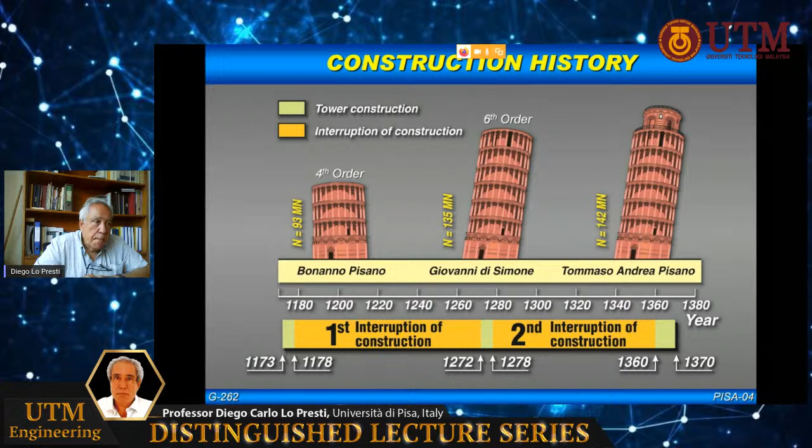The instrumental monitoring of the tower rotation started only in 1911. So before that date, the history of tower rotation has been reconstructed by looking at its banana shape, the shape of the tower axis, which testifies the attempts of masons to correct the progressive rotation of the tower. The last detail testifying this rotation is the number of steps to reach the bell chamber, 6 on the south side and only 4 on the north side.

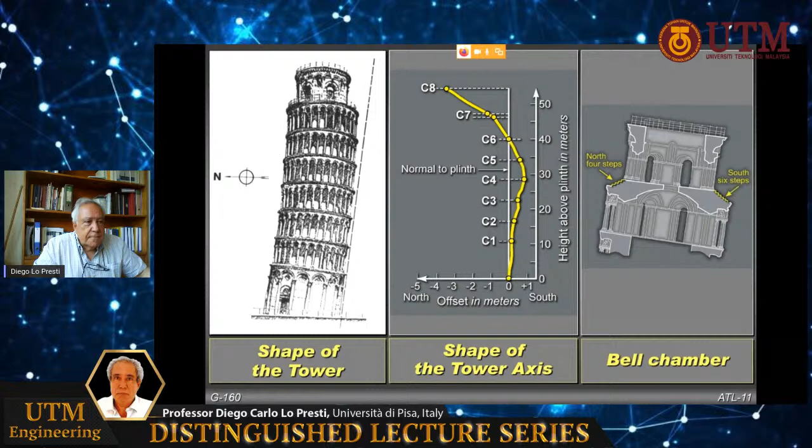Another two essential aspects, important negative aspects concerning the history of the tower, is the walkway excavation done by the architect della Gherardesca in 1838. This walkway is called the Catino, and the good intention was to show the tower in its original shape. Indeed, the tower sank into the soil because of the settlement.

But unfortunately, as the water table is just 1 meter below the ground level, after excavating there was a water inflow, and it was necessary to realize waterproofing work. All this activity, as we can see later, caused a very dangerous tower movement.

As for the structural aspect, the critical point is here, at the level of the first cornice. Indeed, there is a staircase constructed inside the annulus from the base up to the 6th cornice. And the presence of this staircase reduces the cross section at this level.

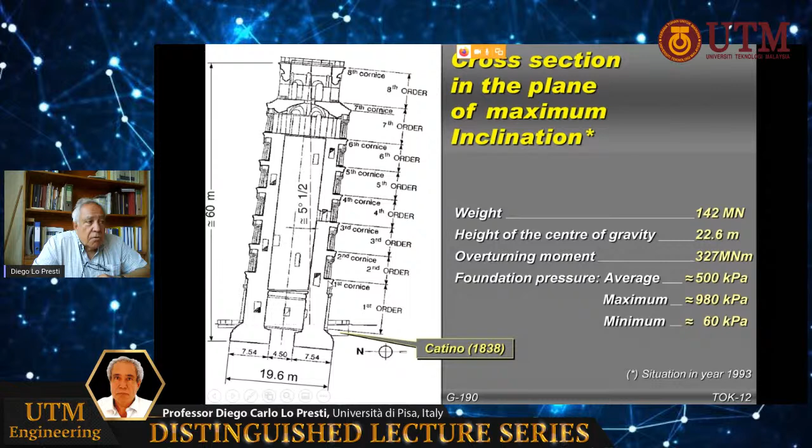You have here an idea of the infill and the facing, but especially of the stress distribution around this opening. And you can see the very high values that have been measured by flat jack in the external and internal facing, which are 10 times the stress in the infill. This is because of the presence of this staircase.

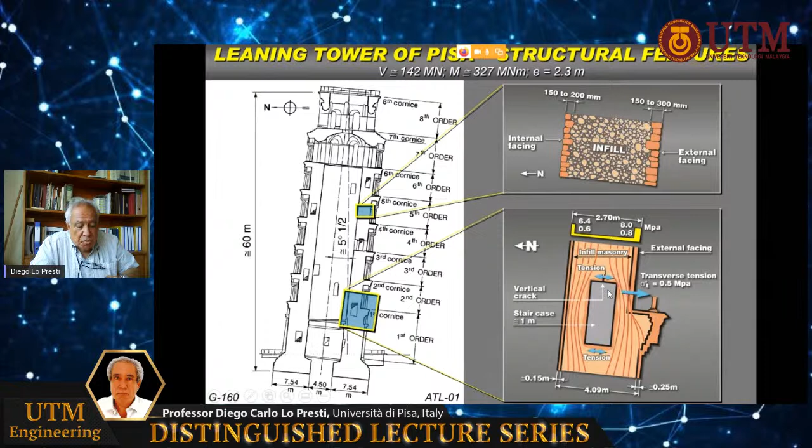So the committee considered the possible risk of a terrible collapse because of this problem. And as a countermeasure, 3 steel cables were put at that level for pre-stressing the structure.

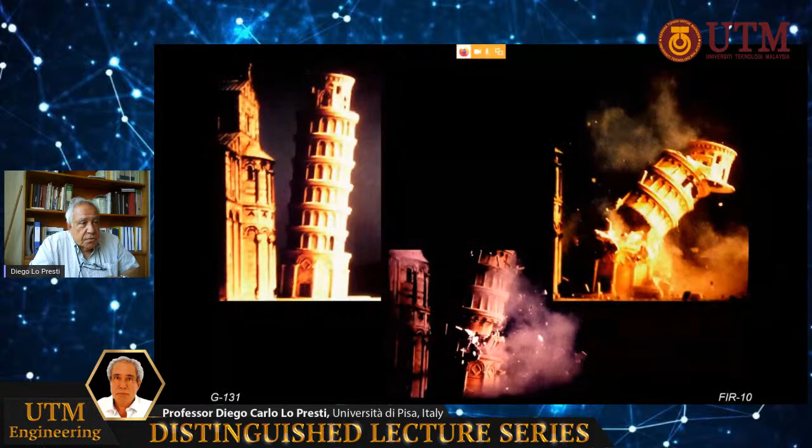As I told you, the movements of the tower have been reconstructed thanks to the shape of the tower axis. Here, the bell chamber was completed. And you can see that initially the tower was leaning towards north by 0.2 degrees. Then we have other documents, frescoes and written documents, that give us information about the evolution of the rotation.

The first measurement by plumb line was done by Cresy and Taylor in 1817. And after the excavation of the walkway around the tower, about 40 years later, another measurement with the same methodology was done by Rohault de Fleury. And this difference is about half a degree because of the negative effect of this excavation. Then instrumental monitoring started, and at this point in 1993, the rotation was about 5.5 degrees.

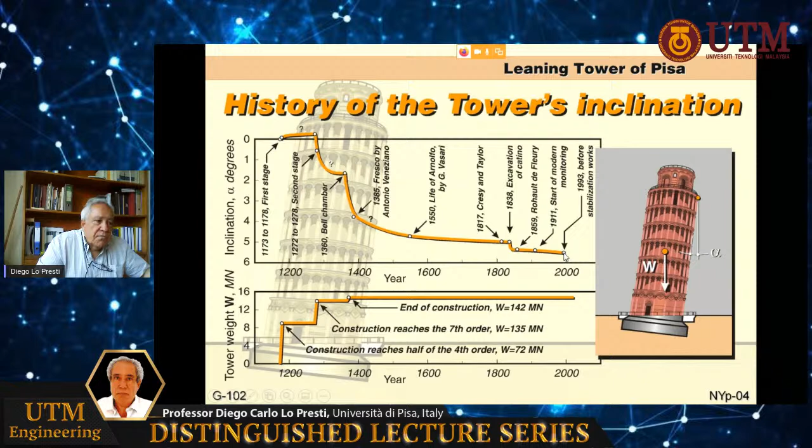So the main problem, apart from the structural problem we have already seen, was the increase of the rate of tilting and the high magnitude of the tilting. This is essentially a problem of soil-structure interaction because the structure is very slender and very heavy, and it is seated on a very compressible ground.

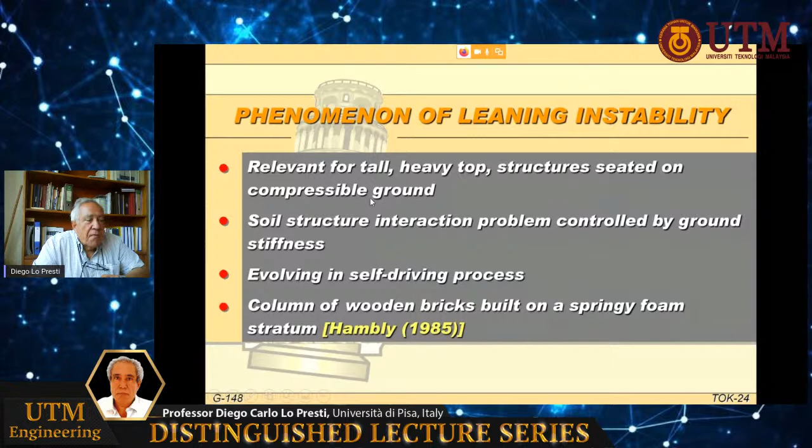The simplest model for this structure is given by an inverted pendulum with the mass concentrated at the top and the reaction spring at the base. We can model the spring as a foundation of a given diameter resting on an elastic half space with given characteristics of Young's modulus and Poisson's ratio. Rotation and settlement can be linked with this simple elastic model to the weight and the resisting moment, which of course depend on the rotational stiffness and on the stiffness.

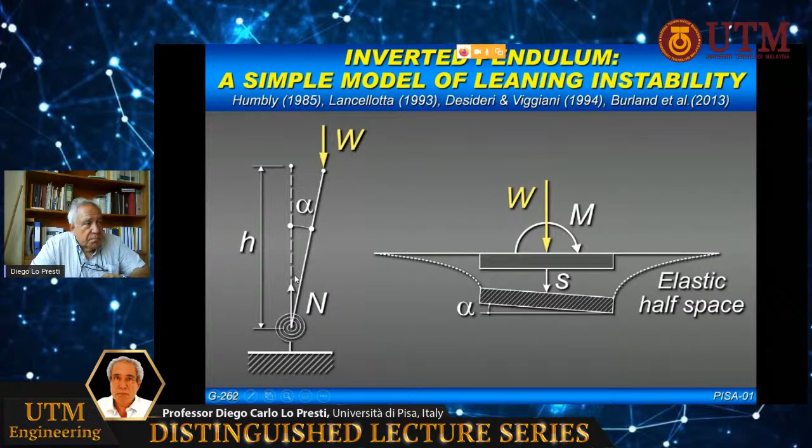On the other hand, the overturning moment is given by the product of the weight by the height of mass concentration and the sine of alpha, the rotation. The safety factor can be expressed by the ratio of the resisting moment to the overturning moment. With this simple model and all the information available, the committee defined a value of 1.1, so very close to a neutral condition, which is immediately before the collapse.

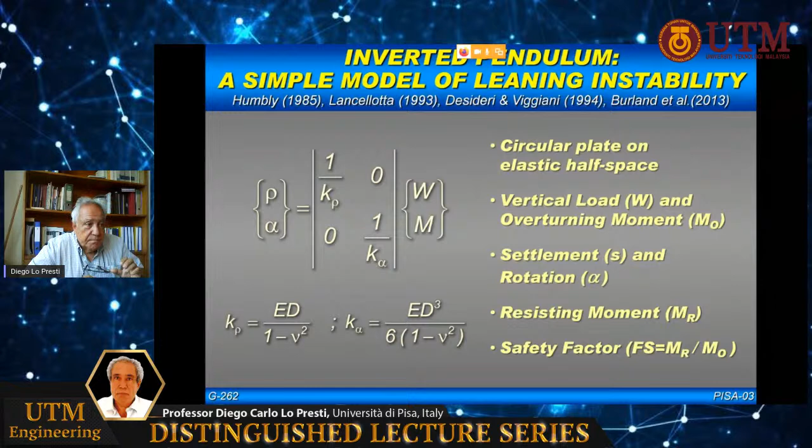The subsoil of Pisa consists of three horizons: Horizon A, Horizon B, and Horizon C. The first one, deposited in a deltaic environment, mainly consists of a silt mixture with a sand layer at the base. The deformation of this layer represents exactly the average settlement of the tower. Then we have a marine formation mainly consisting of clays with an intermediate sand layer.

The upper clay is very soft and compressible. The intermediate is a stiff clay. The lower clay is a normally consolidated clay. The lower sand is a very stiff layer extended 400 meters.

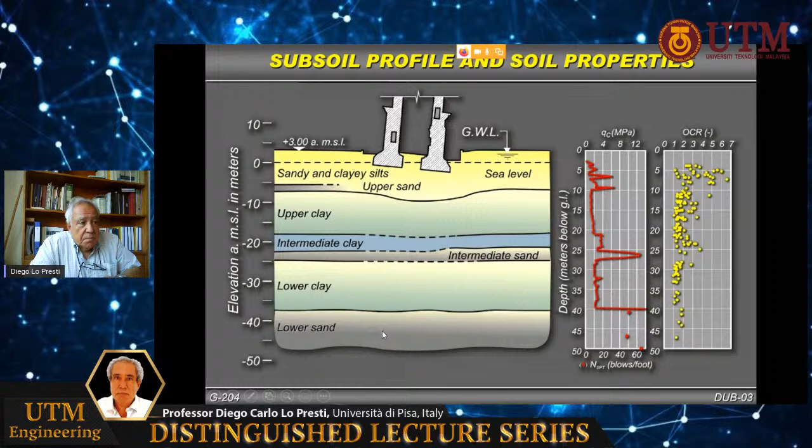And from these cone penetration tests carried out all around the tower, you can see that the upper sand layer disappeared on the south side. And this could explain why the tower, after an initial rotation towards north, started to rotate towards south.

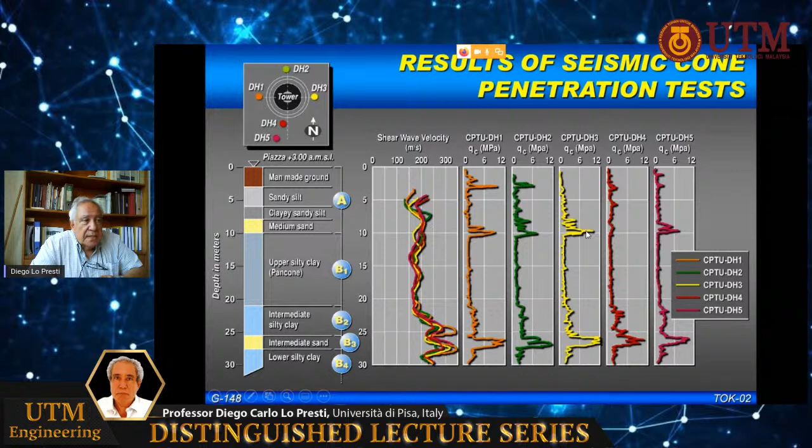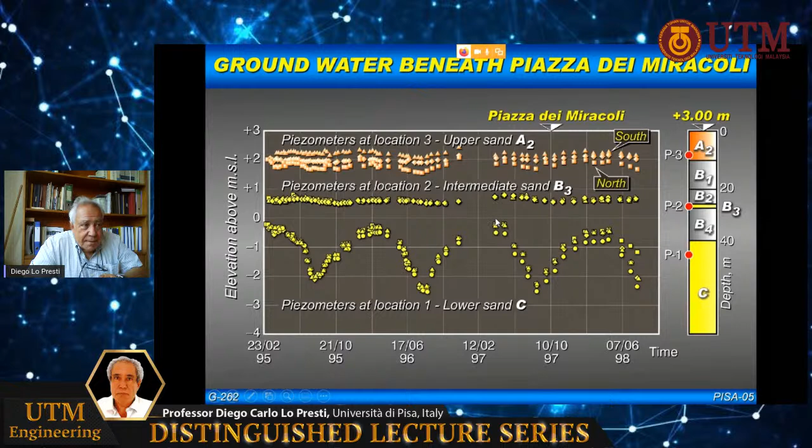The hydraulic conditions are also very complex because we have three aquifers and three different piezometric heads with oscillation. This is also a negative factor, but there is not enough time to go into detail.

So the main threats to the tower integrity have already been discussed: the progressive increase of rotation and the rotation rate, and the risk of sudden masonry failure on the south side between the first and second cornice.

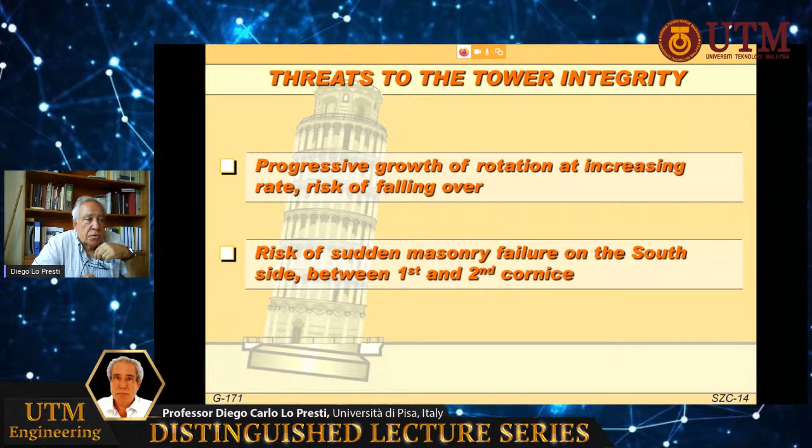As a first temporary countermeasure, fully reversible, a weight of 600 kilonewtons was added on the north edge of the plinth. The final intervention consisted of under-excavation on the north side, so ground extraction to produce a back rotation of the tower.

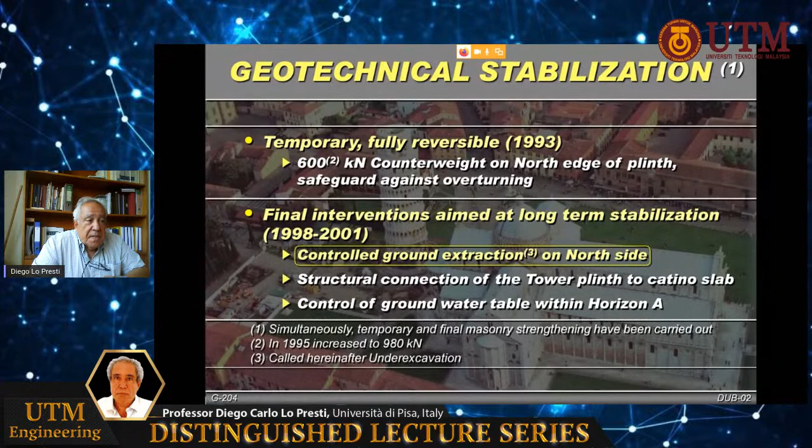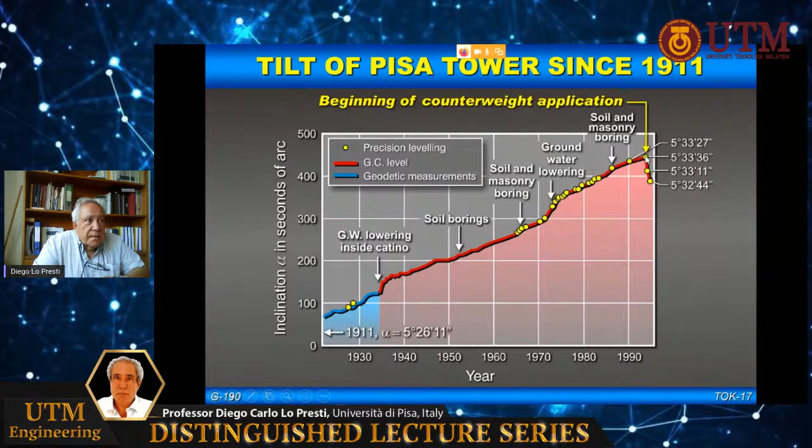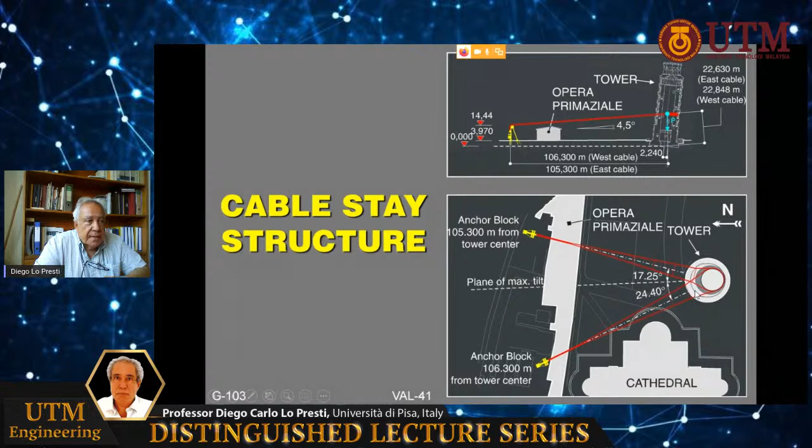In 1993, beginning the counterweight application. As a further measure of safety during under excavation, a cable stay structure was realized: 2 anchor blocks and these cables to apply a force to the tower in case of a problem during under excavation. You can see here the cables and the cable stays.

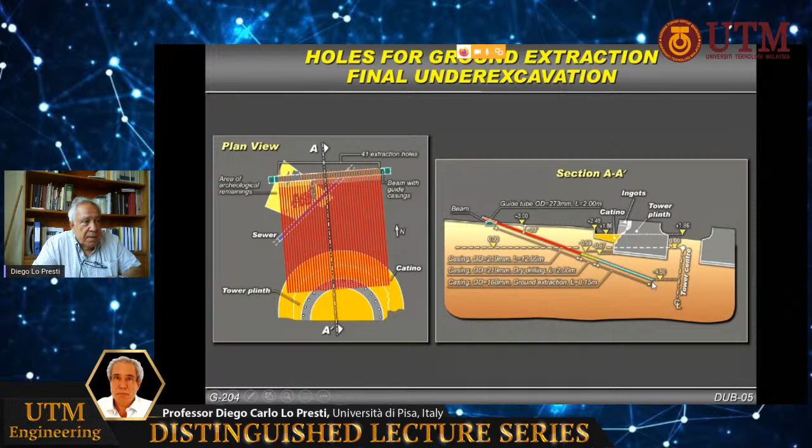The under excavation, final under excavation, was carried out with this battery of augers, extended just beneath the north basement, not extending beyond because it would be negative as a result of numerical and experimental analysis. And you can see here the battery of augers and the effect of under excavation.

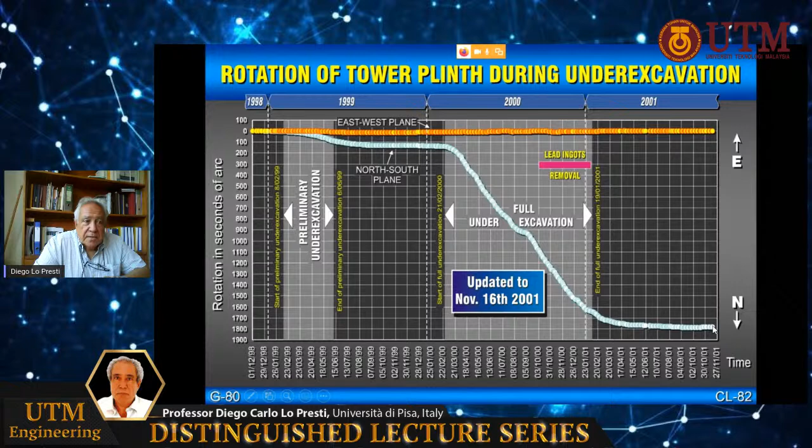The east-west plane remained stable. The north-south plane showed this rotation towards north. This is the preliminary under excavation. This is the full under excavation. And this has continued with a very small increase and is monitored right now. My colleague Nunziante Squeglia is in charge of the continuous monitoring of the tower. As for the settlement, the south registered 1 centimeter heave, and the north a settlement of about 16 centimeters.

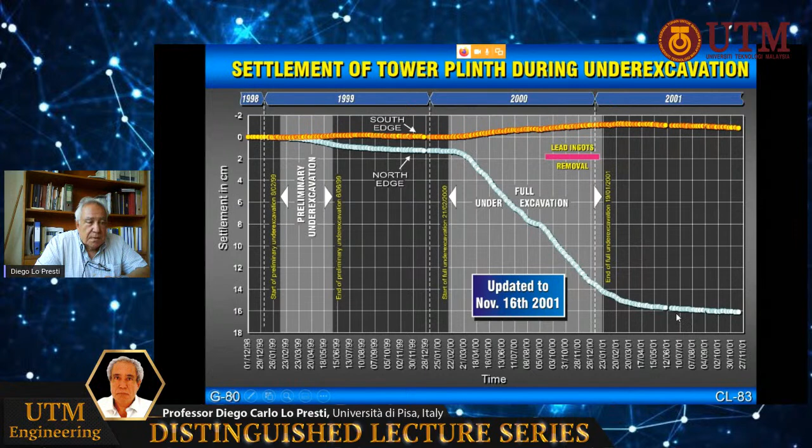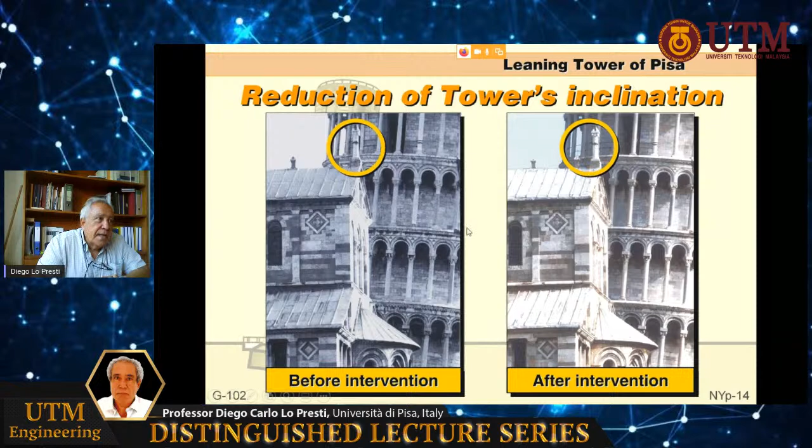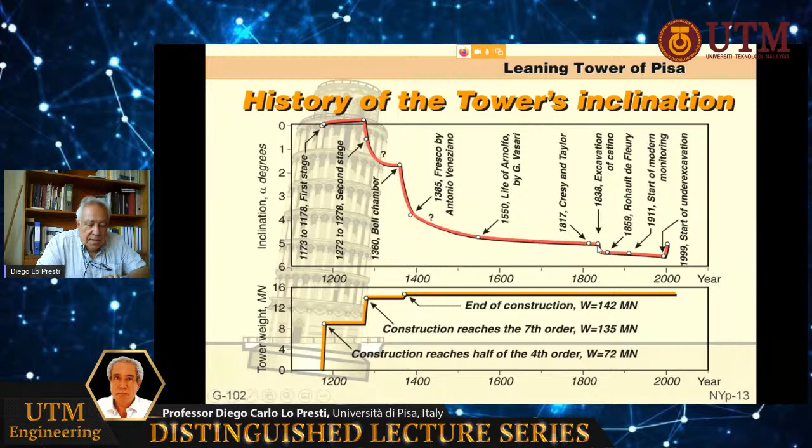And final consideration, in the 60s, an engineer from Rome, Mr. Terracina, published a paper in Géotechnique suggesting the under excavation as a possible stabilization measure. It was long criticized by the Italian academia and not only. And the only person who appreciated his suggestion was Professor Karl Terzaghi, the founder of geotechnical engineering. So sometimes academicians are very, very supponent. But that is the case of these people.

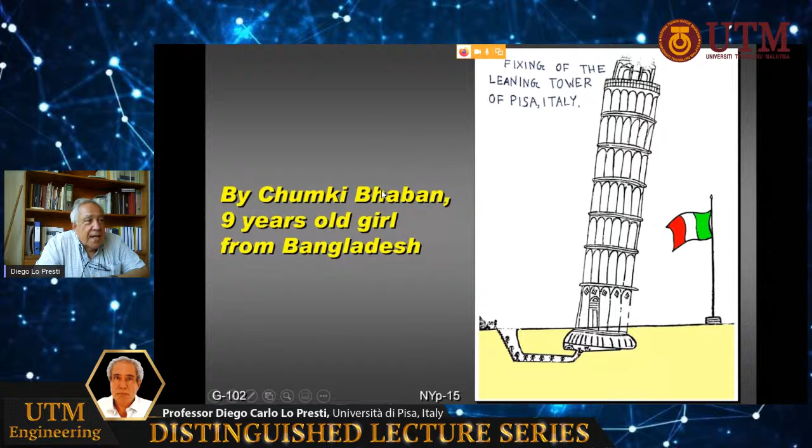In particular, Professor Jamiolkowski received a card from a young girl, 9 years old, from Bangladesh, saying there are many unemployed people in Bangladesh. Why don't you ask them to excavate under the tower for a back movement to the tower? And I am pleased to conclude with this image, saying, thank you, Chumki Bhaban. Thank you very much, everybody, for your patience.

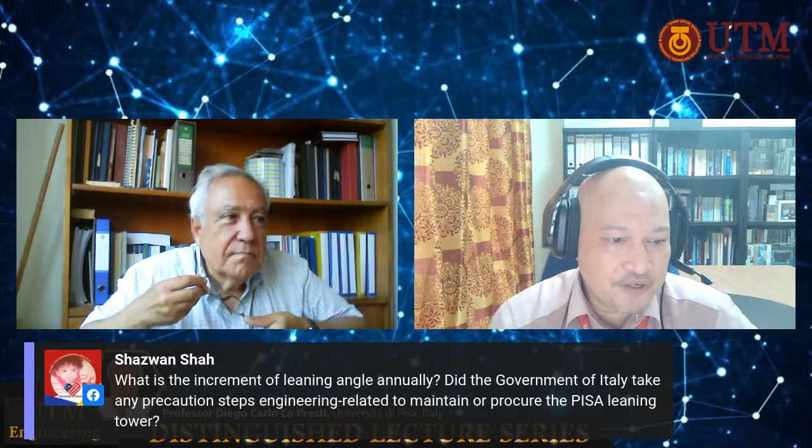Okay, we have one question from Shazwan Shah. What is the increment of leaning angle annually, the rate of leaning? And did the government of Italy take any precaution step engineering related to maintain or procure the Pisa leaning tower? Yeah, he was asking about the actual rate of leaning per year. Okay, so the measure is to maintain a monitoring with several types of instrumentation to take under control the movement of the tower. So right now the movements are very small, continue to be towards the north, seconds of arc per year, very small. Yeah, that's very small.

And is there any specific precaution step related to maintain or procure the Pisa leaning tower? Means that after the stabilization works, what else? Do we just need to wait for another report on the problems when they start to occur, or does the Italian government have a long term plan to recover the reliability of the Pisa tower? No, the Pisa Tower is considered safe. Tourists can enter the tower now. Of course, with COVID, the number of visitors has been reduced, but the tower can be visited. We consider the tower safe and in good health right now, because this small rotation continues to be toward the north, not south. It continues to rotate back, but the quantity is very small. All right, okay.